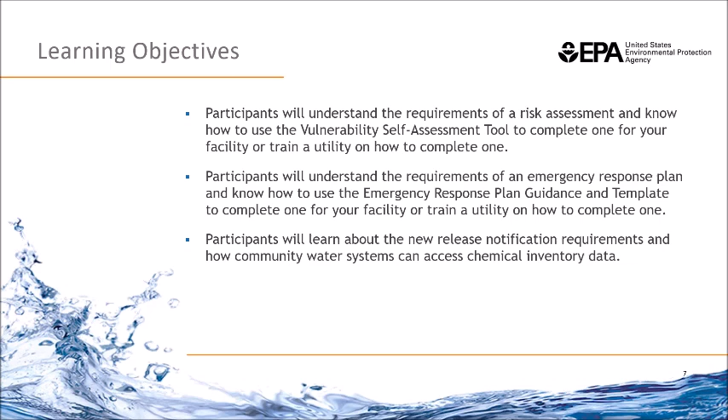So that being said, our goals for today, we have 3 main goals. The first one is to understand the requirements of a risk assessment and understand how to use the vulnerability software. The second goal is to understand the requirements of the emergency response plan and understand how to use that emergency response plan guidance and template. Finally, to learn about the new release notification requirements and accessing chemical inventory data. So those are our high-level goals, but we're going to go into detail about each as we move forward. Our first section today is going to be that background on AWIA Section 2013 A through G.

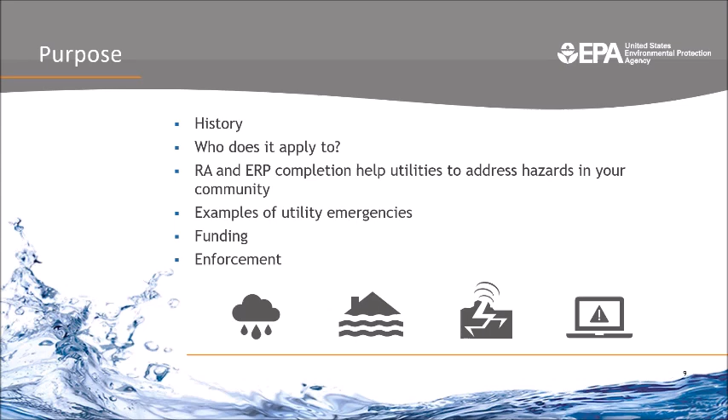In this section, we're going to talk about the history, so some of the previous law, which was the Bioterrorism Act of 2002, and 2013 AWIA. We're going to talk about specifically who this law applies to, and then briefly about why building resilience to all hazards is important at your utility, and some of the resources EPA has developed to help you address those. We'll talk a little bit more specifically about an incident that you may face in your region. Finally, I'll provide you with the latest update on funding and the enforcement discretion in place if you do not comply within the required timeline.

So many of you probably remember the Bioterrorism Act of 2002, especially those from a water utility. That Act of 2002 added Section 1433 to the Safe Drinking Water Act, which required water systems to assess their vulnerabilities to terrorists or other intentional acts, and then based on that assessment, prepare emergency response plans. This act was quite focused on gates, guns, and guards, because it was focused on physical security overall. The statute required community water systems to conduct a vulnerability assessment by set deadlines, submit a copy of that assessment to EPA, and then develop an emergency response plan and certify completion of that response plan to EPA. But it did not require anyone to periodically update those risk assessments or emergency response plans. The vulnerability assessments were meant to identify risks associated with terrorist attacks or other intentional acts designed to disrupt the system.

So these are some of the big differences we're going to talk about today. To start off with, it required that water utilities submit a copy of the vulnerability assessment to EPA. For AWIA Section 2013, and we'll definitely go over this many times, we are not accepting the assessment themselves. We're only looking for the certification that you've completed your risk assessment and emergency response plan.

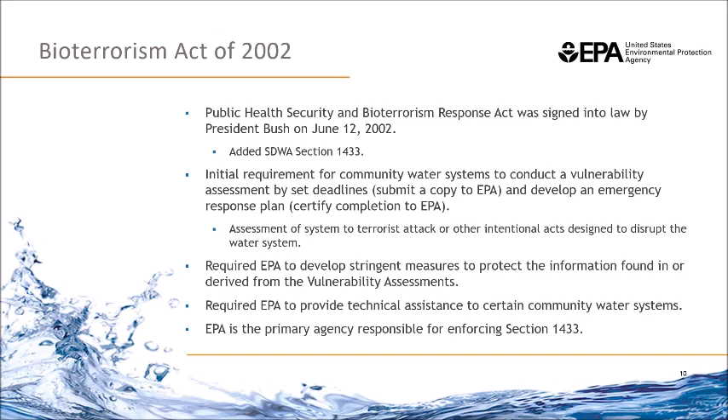So during this time, the Bioterrorism Act of 2002, this is where the Water Security Division emerged, to help water utilities comply with this law. And we've similarly done the same with AWIA Section 2013. With this, EPA was named the primary agency responsible for enforcing this section of the Safe Drinking Water Act. So that's just a brief background on the Bioterrorism Act of 2002, which has some similarities and some differences to the one we're going to talk about today.

One similarity is that AWIA Section 2013 is an amendment to the Safe Drinking Water Act, Section 1433. One difference is that it requires not only the initial risk assessment and emergency response plan, but also recertification every 5 years, whereas the Bioterrorism Act did not require that. So the old vulnerability assessment is now replaced with the new risk and resilience assessment.

AWIA Section 2013 expands the risk types addressed in this assessment to include risks of natural hazards and malevolent acts. In addition, community water systems are required to evaluate the resilience of their current physical infrastructure, as well as their management practices, which can include financial capacity to respond to these risks.

Based on the assessment, public water systems must also develop emergency response plans that address the risks and resilience issues that systems may face. So some of the differences here are it's not just malevolent acts and potential terrorist attacks, but also resilience to natural hazards as well.

EPA is required to provide guidance to small systems who are not required to comply with the certification requirements, which are those systems serving a population of 3,300 or less. So basically, this means any drinking water system servicing a population of 3,301 and above is required to comply with AWIA Section 2013. EPA is still responsible for directly enforcing Section 1433.

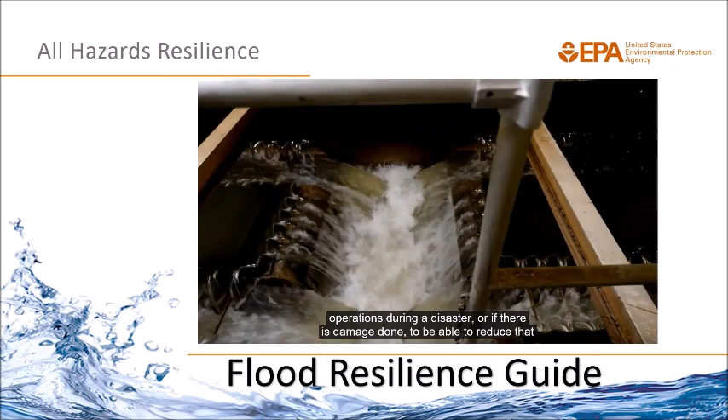Berwick, Maine. Part of EPA's mission is to help water and wastewater utilities build resiliency to disasters. Resiliency means the ability of that utility to maintain operations during a disaster, or if there is damage done, to be able to reduce that level of damage, or if they lose their ability to serve water or wastewater, that they'll be able to restore those operations quickly. There are tens of thousands of water and wastewater utilities around the country that face all sorts of disasters, hazards, extreme events. We want to assist with that resiliency, and we want them to understand that the way you can build resiliency is to look at vulnerabilities and then identify measures that can mitigate those hazards. We're here in Berwick to work on a resiliency pilot project to look at some of the vulnerabilities and ways to mitigate them - in this case, flooding.

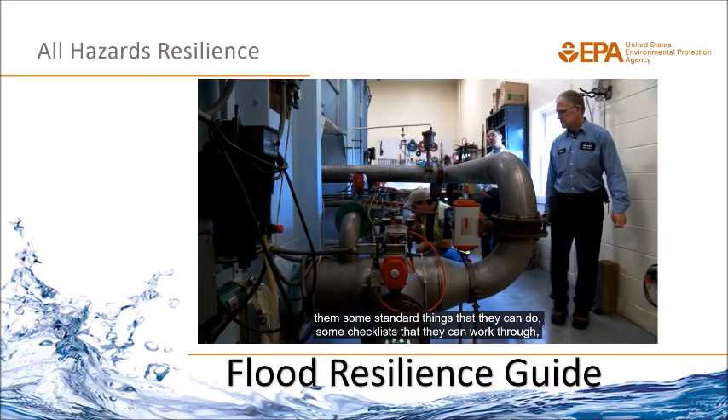We had two 100-year floods, one year and the next. It was totally unexpected, and the second one came with little warning. Over the past two days, we've conducted an on-site vulnerability assessment for the Berwick Water Department and their water treatment plant, storage system, intake system, and distribution system. What we're hoping to do is give them some standard things they can do, some checklists they can work through, and vulnerabilities they can look for in their water systems to try and come up with some sort of mitigation measures.

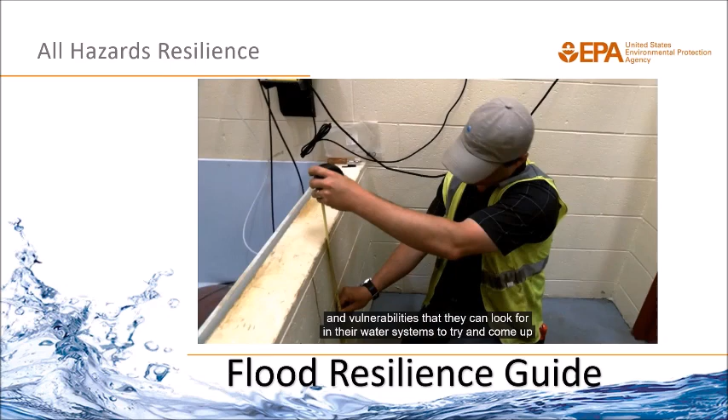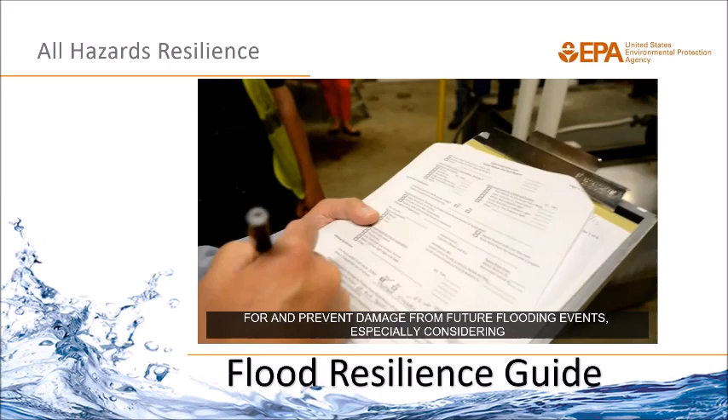Increasing your utility's resilience to flooding will help you become better prepared for and prevent damage from future flooding events, especially considering that climate change impacts could result in more frequent and more intense flooding. You can assess your current resilience to flooding and improve your ability to reduce impacts by following these four steps.

Understanding the threat of flooding, by evaluating the likelihood and the potential severity of flooding at your utility, identifying vulnerable assets and determining consequences, by assessing critical operations and equipment that may be disabled or damaged by flooding, identifying and evaluating mitigation measures, by considering actions that will protect your utility from future flooding, and developing a plan to implement mitigation measures, by prioritizing cost-effective mitigation measures and scheduling completion.

First and foremost, one of the things we recommend to water systems to do is get to know their local emergency manager, because that's going to be the key to opening up state and federal funds to help avoid damage from future storms. I'd be implementing some planning right away and some low-cost alternatives right away, and then looking at the big budget picture for other things.

We're encouraging utilities to not wait for a disaster because it's much more costly after a disaster to restore operations, and people's health and welfare are at stake. Think ahead. Make plans now. Reduce the risk, and you'll be happy in the end.

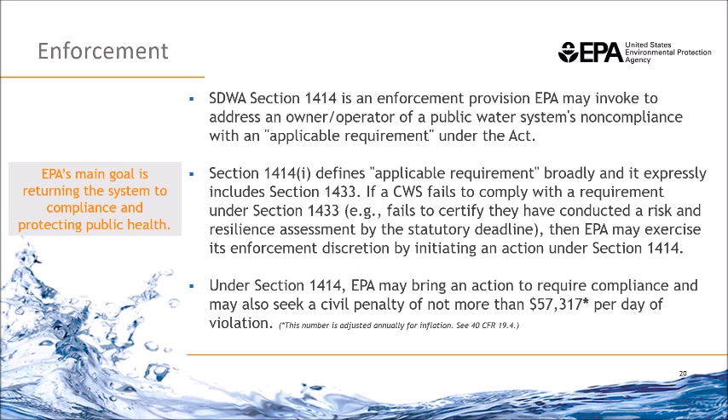So now we're going to just test your understanding. AWIA Section 2013 is an amendment to the Clean Water Act, true or false?

Okay, so we had sort of mixed results here. AWIA Section 2013 is an amendment to the Safe Drinking Water Act. So commonly you'll see it as SDWA. And that's useful if you're looking at some of the legal requirements under there, but this is generally a trick question because they sound pretty similar. So AWIA Section 2013 is an amendment to the Safe Drinking Water Act, just to reiterate.

And then this is to test your understanding about a not trick question. So your utility serves a population size of 4,000. Are you required to certify completion of your risk assessment? So this is a hypothetical question.

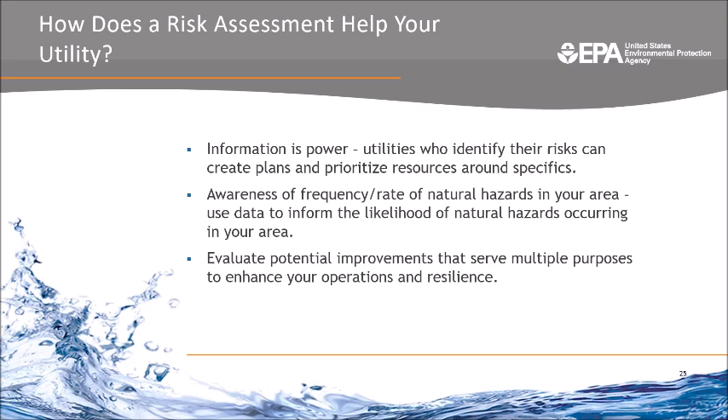As well, the value of the risk assessment is also to help you prioritize the projects you'll invest in at your utility. So once you understand all the risks, it really will give you a cost-benefit analysis that you can look at and say, this doesn't cost that much, but it will benefit our utility way more maybe than you had initially thought if there was a flood or a hurricane or something like that. So those are some of the ways a risk assessment would help.

The monitoring practices of the system. So examples of monitoring practices may include sensors, laboratory resources, sampling capabilities, and data management equipment and systems. It also includes the financial infrastructure of the system, so this could be billing, payment, and accounting systems, as well as third parties used for those services.

As well, the use, storage, or handling of various chemicals by the system. So an example could be storage facilities and handling practices used for chemical disinfection and treatment. Assessments under this asset category should focus on the risk of uncontrolled release of a potentially dangerous chemical like chlorine.

It also includes operation and maintenance of the system, so that might include equipment, supplies, and key personnel. As well, the assessment may include an evaluation of capital and operational needs for risk and resilience management for the system. The risk assessment should also consider and address risks at any consecutive system that could impact the water system.

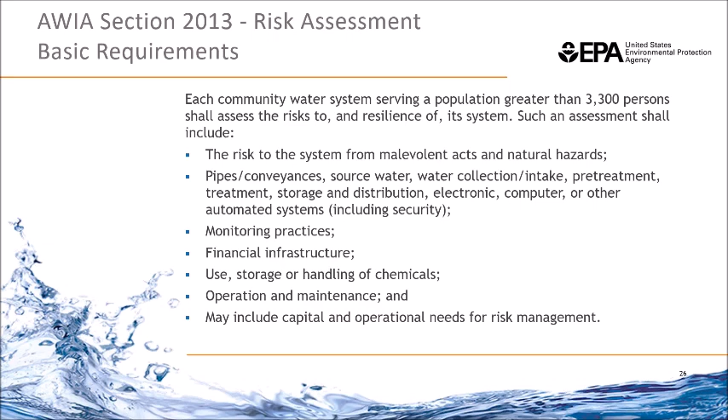So we've already talked a lot about resiliency and making a utility more resilient, but what exactly does that mean? Here we're talking about the ability of a system to adapt or withstand the effects of a malevolent act or natural hazard without interruption to the asset or system's function, or its condition. So this is an important definition to keep in mind if you're ever wondering what we really mean when we say resilience and for the risk and resilience assessment.

As we continue in our workshop, we're going to review the vulnerability self-assessment tool, referred to as VSAT, and this includes a resilience indicator that will assist you in measuring your system's resilience.

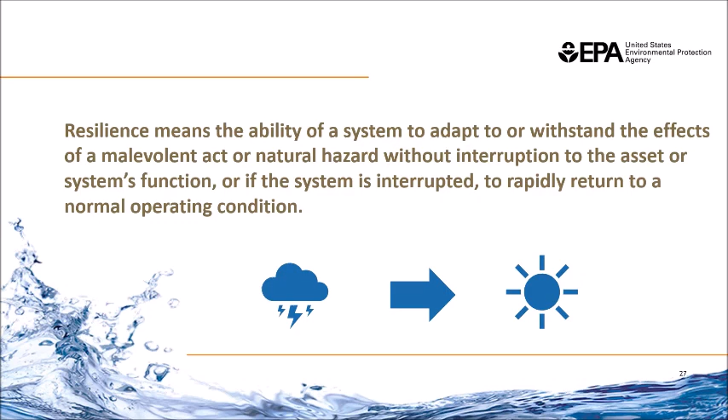So we have resilience and now we have risk. So what is risk? Some of you may have seen this equation before, and it requires estimating 3 parameters.

It requires estimating the consequences, which are the public health and economic consequences resulting from the impact of a malevolent act or natural hazard on the facility. It also requires assessing vulnerability, which is the probability that the malevolent act will have an adverse impact on the facility, and it requires estimating threat likelihood - the annual probability that a perpetrator will attempt to carry out the malevolent act against the facility. So these 3 parameters allow us to analyze the water system's risks: risk equals consequences times vulnerability times threat likelihood.

We're going to take that equation a step further and use the risk analysis and management for critical asset protection process, also known as the RAMCAP 7-step process, for analyzing and managing risk in the framework being applied in the AWWA J100 standard, as well as the baseline threat document, which we will review shortly.

Step 1 is asset characterization, which is determining which assets are most critical in order to understand the assets that, if compromised, could result in prolonged or widespread service interruption, injuries, fatalities, detrimental economic impact, or any combination thereof. So you start with the question: what assets do I have, and which are critical? By critical, you want to focus on those that would make your system inoperable and result in major health impacts or the shut off of a water supply - focusing on critical assets, not all assets that your utility may have.

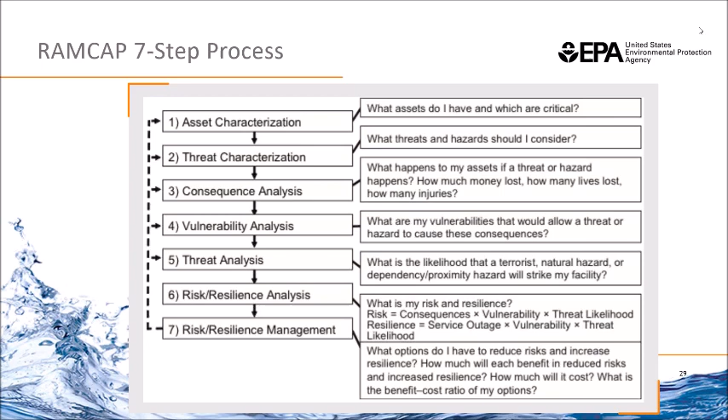So here's just a quick knowledge check: what is the risk equation?

Great, yeah, they're both similar, but the answer is that risk equals consequences times vulnerability times threat likelihood. So that's the formula we're going to be using today.

Now we're going to go over what the steps are to complete the risk and resilience assessment. So now that you know the basic requirements and some of the definitions we're talking about, we're going to really get started.

In general, the process to conduct the risk assessment could take up to 6 months for larger utilities, but it can also take much less time depending on the size of your utility and the way that you organize your process. So today we're going to go over one potential method of conducting a risk and resilience assessment, just understanding that there are alternative ways to do it, and we're just presenting one that has worked for some water utilities.

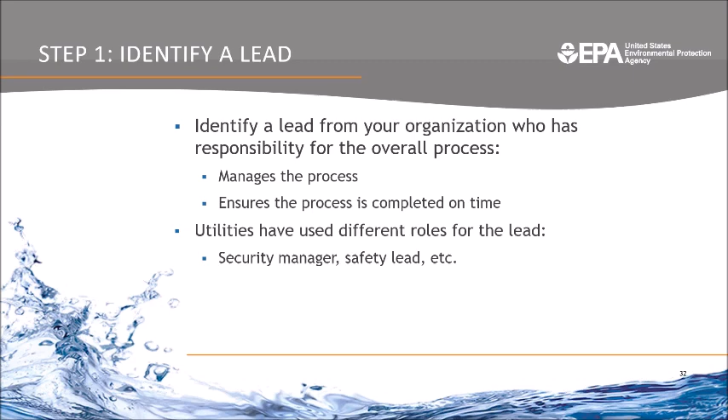Step two would be to build a team of key personnel who will provide the necessary information about the system. It should include personnel from each specific section in the organization to ensure that the process is well informed, so that could include someone from operations, maintenance, human resources, budgeting, contracting. For smaller utilities, one person might have several jobs, but again, it's building a team that makes sense for your organizational structure. Once you have a team, you'll need to hold a meeting.

You might want to start a workshop process, which is what some utilities have done, or you might want to take advantage of a standing organizational meeting that already includes key personnel. During that meeting, you'll inform them of the background we just covered and the purpose of the exercise, which would be the risk and resilience assessment.

Step three would be to identify critical assets. We touched on this a little bit, but another way of thinking of it is to think of what makes the system inoperable, so not every asset is critical. It's an essential step in the process because it will ensure that you don't end up with more than 20 asset threat pairs when you do your analysis. So we do ask that you be deliberate with this discussion in excluding non-critical assets.

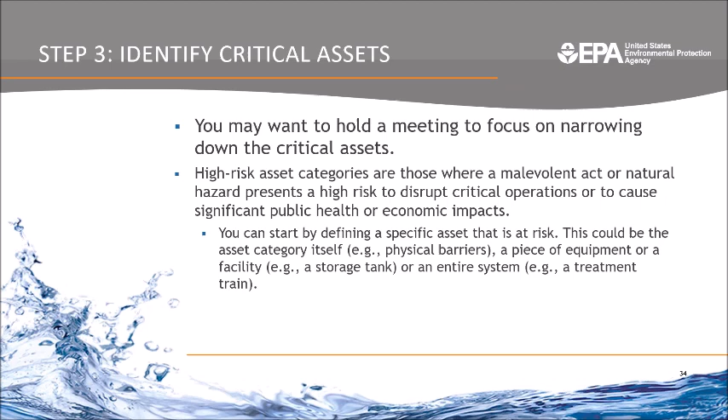You can start by defining a specific asset that is at risk, and that could be the asset category itself, so for example physical barriers, or it could be a piece of equipment at the facility, a storage tank, or it could be an entire system. But step three, once you have your lead, you have your team, you're going to want to identify those critical assets that would make your system inoperable.

Now step four is to take a look at the malevolent acts that could impact your utility's critical assets. At this point, we're going to go over a tool we have to assist you in doing this. It's called the Baseline Information on Malevolent Acts Relevant to Community Water Systems.

This document was required by law to be developed by EPA to assist utilities in identifying the malevolent acts of highest risk to their utility. It's a free resource that's in PDF format on EPA's website, and we'll ensure that everyone has the link to the document. I believe it's in the resource document, but also in the email you'll receive.

So the purpose of the Baseline Threat for Malevolent Acts document is to assist community water systems in identifying the types of malevolent acts that could impact community water systems and assist community water systems with estimating the threat likelihood.

In order to cover the types of malevolent acts that can occur, the Baseline Threat document pulls from the AWWA J100 standard for risk and resilience management of water and wastewater systems, which provides an extensive set of malevolent threat scenarios. These scenarios were adapted for water systems from that RAMCAP methodology, developed by the American Society of Mechanical Engineers, later endorsed by the Department of Homeland Security. It's an all-hazard and resilience management process for critical infrastructure.

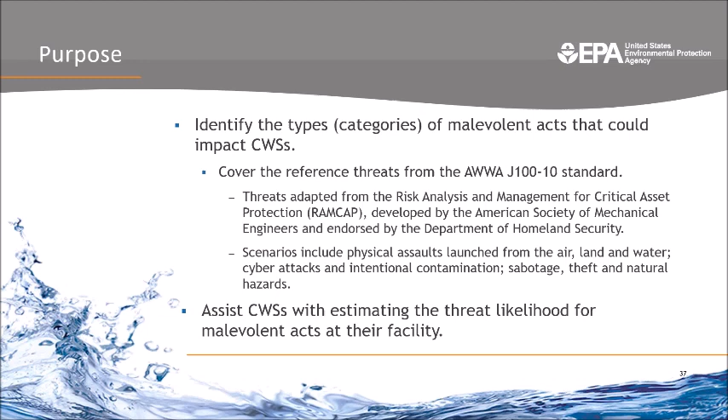So how does the document help you? Well, I think I mentioned this, but just to reiterate, it helps to estimate the likelihood of malevolent threats your facility may face. And this can be difficult to do for a number of reasons.

One being that physical attacks and intentional contamination incidents at water utilities do not occur frequently enough to establish any sense of likelihood based on historic frequency. So it's unlike a hurricane where you can look at the past decade and say it happened X number of times. Physical attacks do not occur frequently enough and are more randomized, so that can be hard to estimate.

As well, vandalism and theft occur more frequently than physical attacks and contamination, but most systems don't have the data to estimate the likelihood that their utility will be targeted. And although the intelligence and law enforcement agencies have information to identify patterns of criminal activity, these sources don't focus on the likelihood of these types of incidents occurring at water utilities.

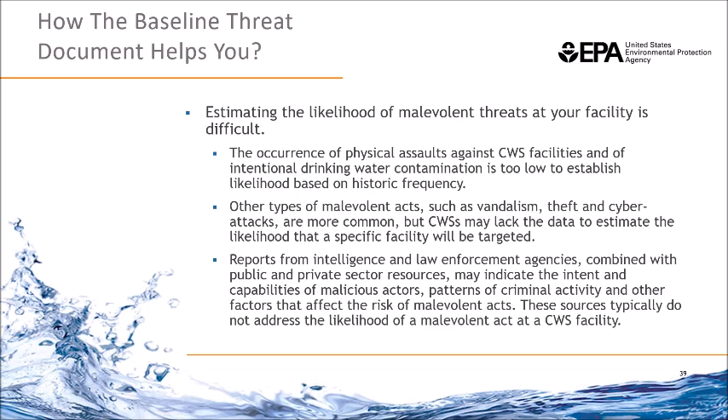So this basically tries to make the threat likelihood specific to community water systems and look at the frequency that it might happen specific to community water systems. So this document assists you in limiting the number of malicious acts that a community water system must address. To do that, the document has grouped several individual malicious acts into broader categories, basically to simplify the process.

So on the next slide, I'll show you an excerpt from the document to demonstrate how the groups were developed. The document also provides the threat likelihood estimates for community water systems to use as a starting point when calculating the likelihood of a malevolent act at their facility. And the basis of this calculation is provided in the background information. So the methodology and where these numbers came from is in the background section of this document.

The document also asks questions concerning general and threat-specific factors to help utilities determine if the threat likelihood at their respective utility is increased or decreased. Finally, the document provides a list of available resources to assist the utility in finding out additional information about malevolent acts.

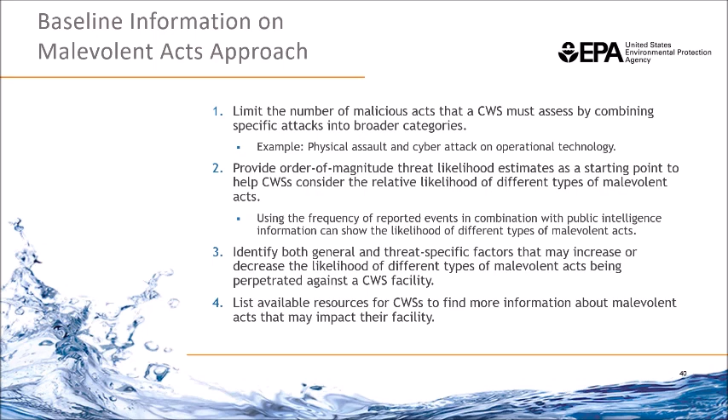So this slide here is a depiction of Table 6 from the baseline information document. And it covers the threat category for assault on utility physical. So you can see here that the AWWA J100 scenarios have been grouped into this one threat category, and they're listed on the left. So the AWWA J100 standards are those that say aircraft, assault team, maritime, vehicle-borne bomb, directed contamination of product. And this document combines those into one threat category, assault on utility physical.

And then on the right, you'll see the calculated threat likelihood for water and wastewater utilities. And there's also questions that make this threat likelihood specific to your water utility. So those would include things like, do you have strict access control at your facility?

So you'll answer yes or no. It might also ask, are there physical barriers to impede unauthorized access? So your answers to those questions will modify the default threat likelihood.

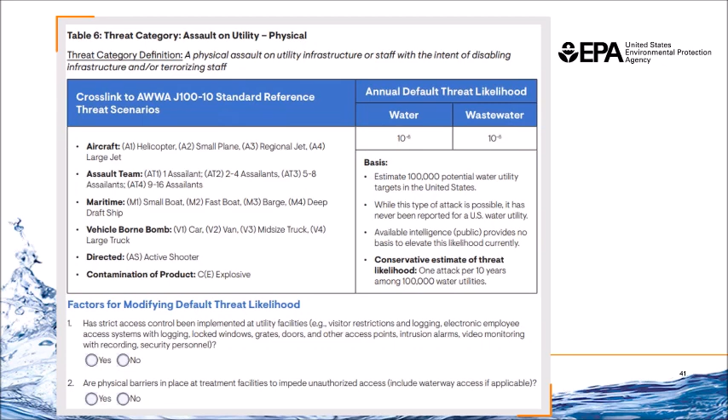If you answer yes to most of the questions, it will indicate a decreased risk for the threat category. If you answer no for most of the questions, then your system might be at an elevated risk for this threat category, and you may want to use this threat to pair with your critical assets in your ultimate risk and resilience assessment.

So that's the process for identifying malevolent acts with that document that is in your resources handout. As well, there's...

then you'll want to identify natural hazards. You have malevolent acts, and now you're identifying the natural hazards that are of greatest threat to your facility. And if you've already conducted a vulnerability assessment or risk assessment, you can start there. You've probably identified these natural hazards already.

As a next step, you can also check your local hazard mitigation plan. So many state and local governments have existing hazard mitigation plans, which summarize the overall strategy for a community to reduce losses and break the cycle of recurring damage. The mitigation plan typically summarizes each hazard. It sets clear goals for being disaster resilient and identifies a list of appropriate mitigation actions.

So you don't necessarily need to start from scratch here. Looking at your past assessments, seeing if the local authorities or the state has an existing plan, and then really making it specific to your water utility.

And if your state or local emergency management agency doesn't have a hazard mitigation plan, they often have a response plan, and that information may already be identified in there.

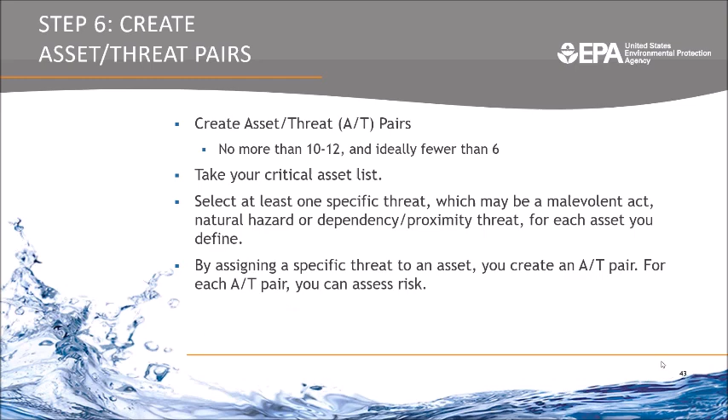Here's another knowledge check. What document does US EPA provide to assist you in assessing malevolent acts at your utility?

Another person, Travis, mentioned that reviewing their ERP will show threats. And that's accurate, definitely.

So what factor of the risk equation does the baseline information on malevolent acts document provide?